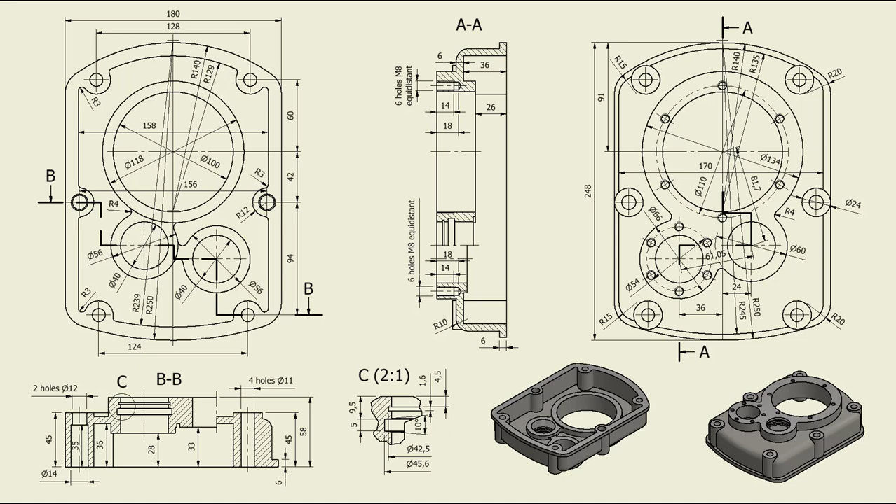Hi my friends, let's model the part number 77 from my collection of 100 parts.

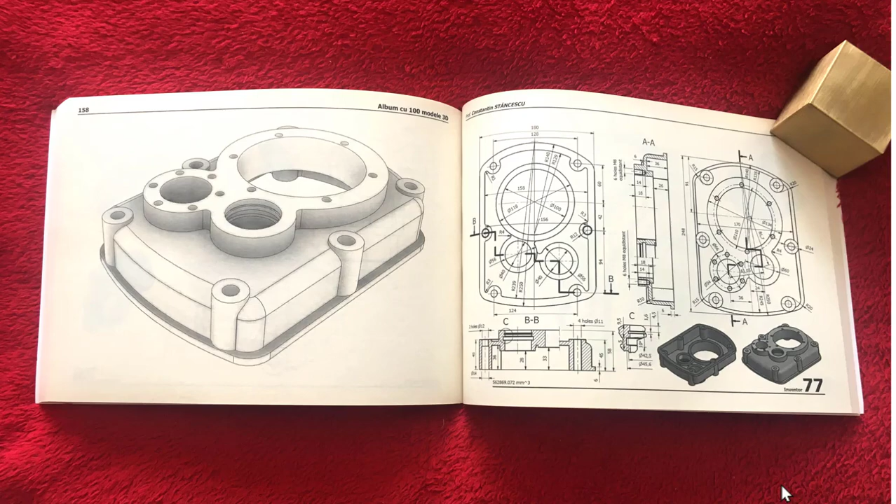The picture for this part is this, and there are some difficulties to create it, but not so great. They are many, but not difficult. Yes? We start by creating this face, the bottom, this one, as a frame. Yes? Then we extrude it on a height.

Then the other features. Dimensions for this frame are here. 180 and 248 are the general dimensions. The others are here and we'll use them. I don't enumerate. You see them in the picture. Let's start.

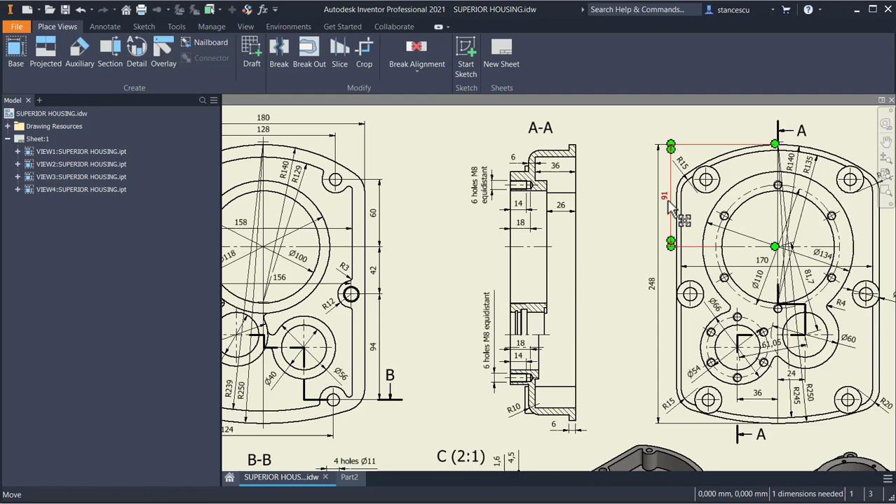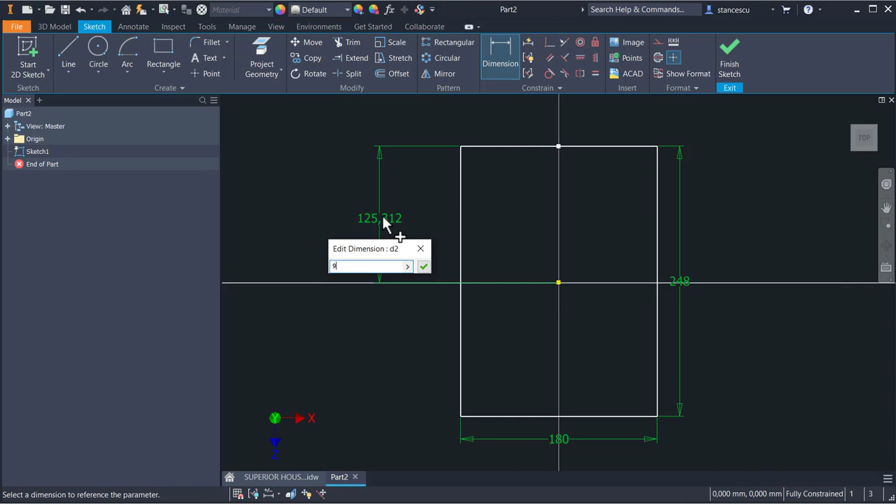This is the plane, X horizontal, and then we draw a rectangle with that dimensions, 180, tab on 248. This midpoint is on the same vertical with the center point, and there is a dimension here, 91, from the up to the center of the main hole. We use this to place here the center point, 91. These two are for tangency. They are not participant in the extrusion.

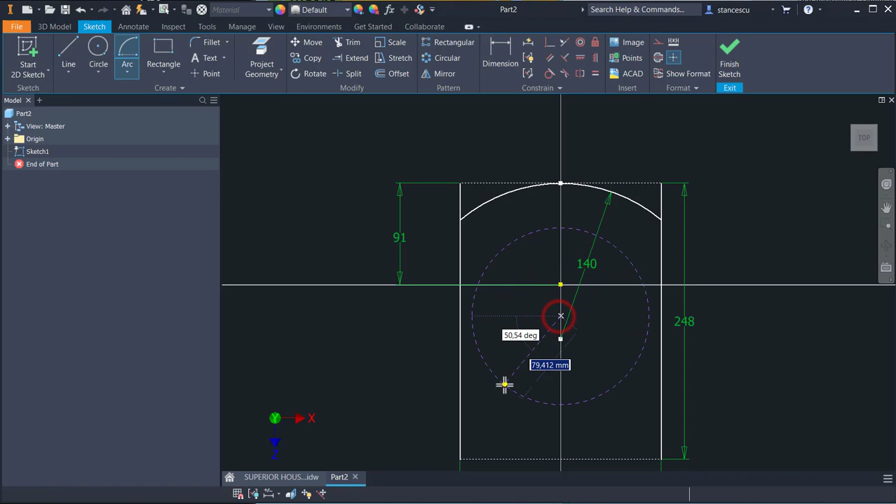Next are some arcs tangent to the lines. Here must be extended because I want to be limited. The center is on the same vertical, tangent up, and radius of 140. Same is down, from one side to the other. Both points are okay, and the center is on the same vertical, tangent, with another radius of 250.

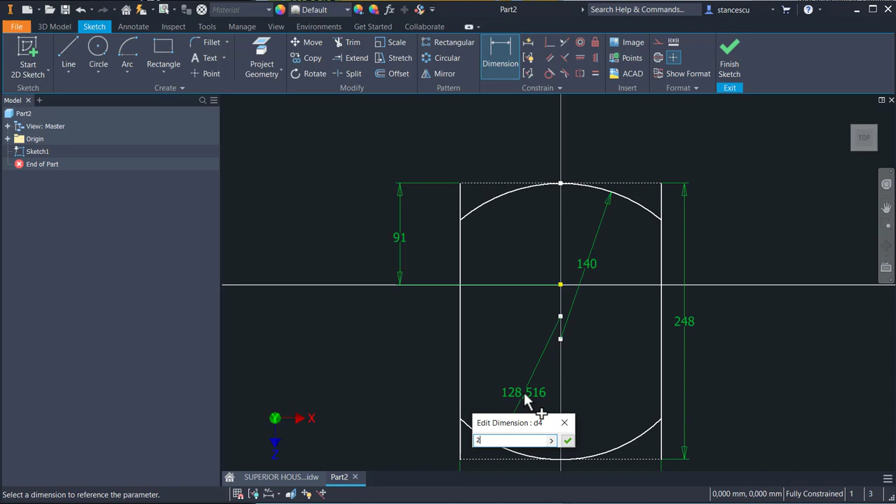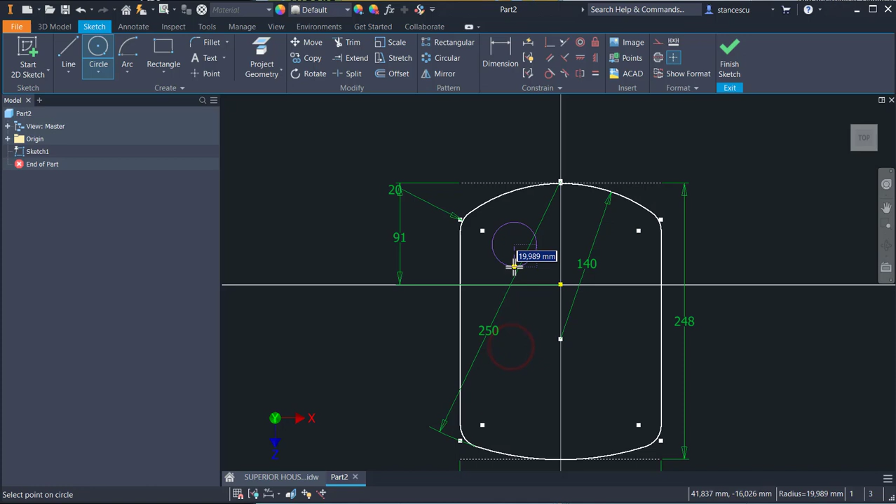Okay, now I make fillets of 20 between these arcs and lines. Okay, then 6 circles, one of radius 12, and the others will be placed anywhere, being equal in radius one to each other. Now pairs are on the same horizontal.

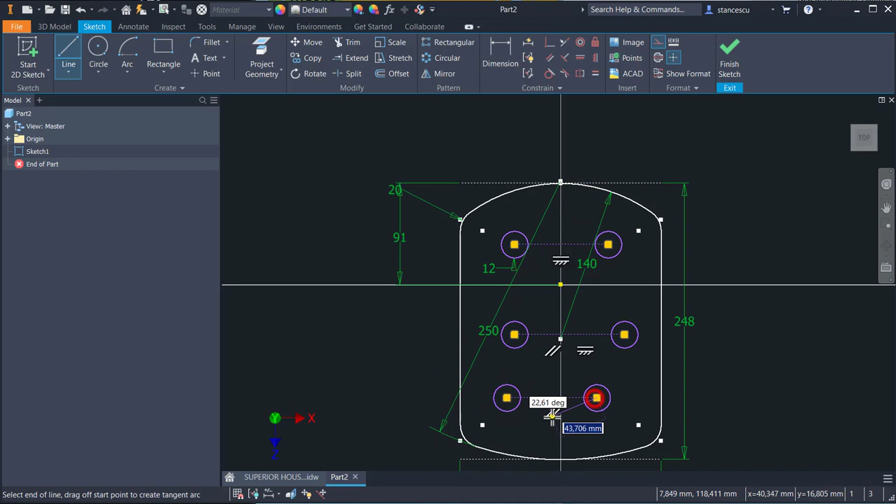I have to draw as construction lines connections between pairs, because they must be aligned with their midpoints with the center point. The midpoint centered, midpoint centered, midpoint centered. Dimensions measured from this point are 60 and 94.

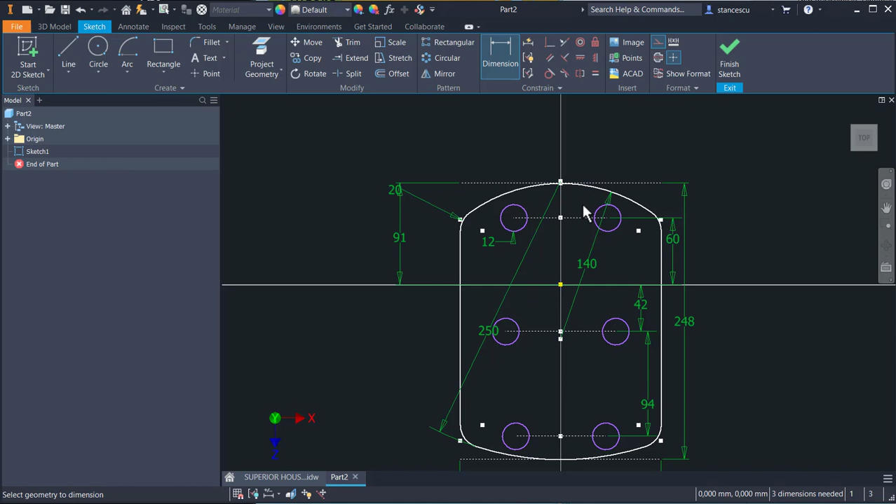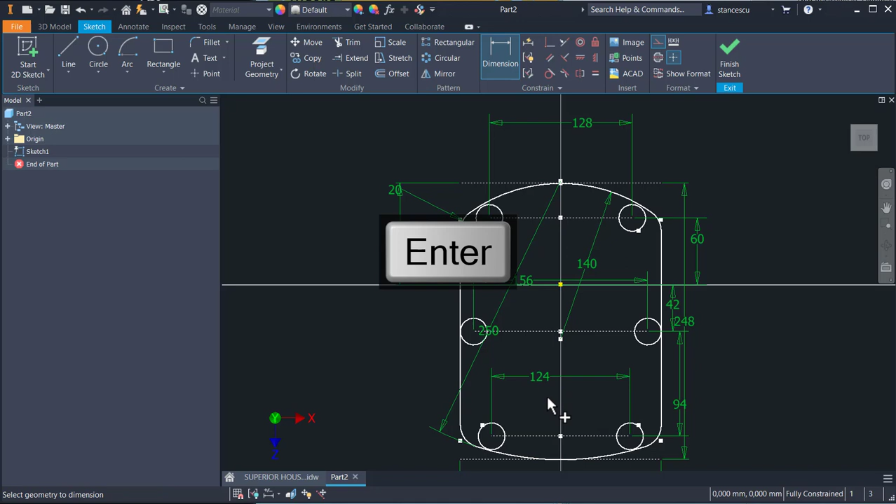And distances on horizontal are 128, 156, and 124. Okay. A line from up down, but not as a construction line, which must be split or trimmed. Yes, trimmed, because I apply collinearity

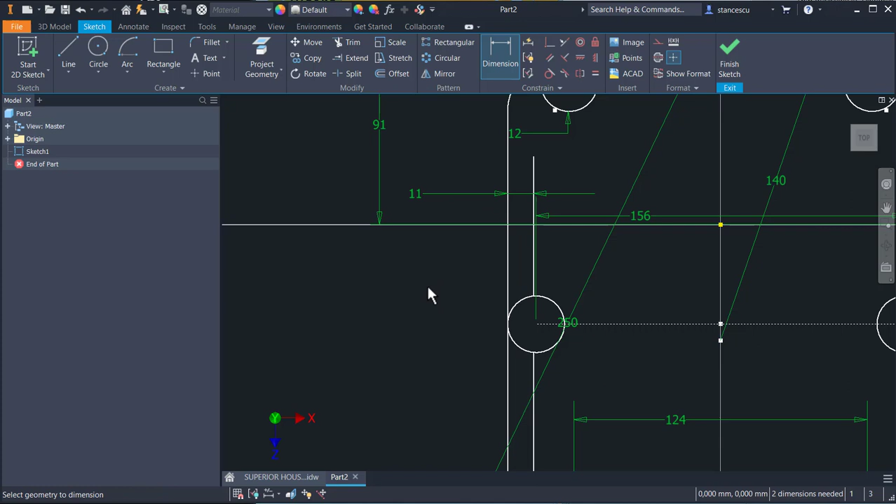and the distance of 180 minus 158. Dimensions are in the drawing divided by 2. I don't come back to them because there is no time. You can verify.

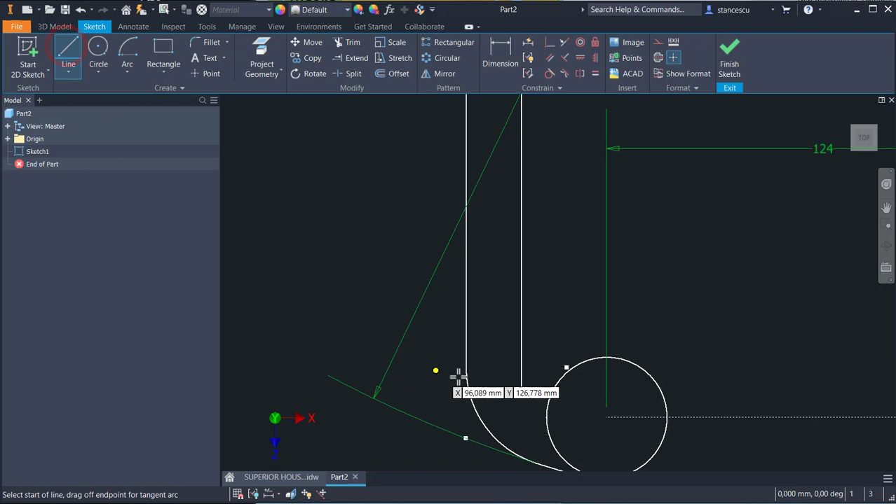Now I draw an arc between the end and the circle with a radius of 3. Here is a tangency, but here is not. Same in the bottom, a line from here to a point, tangency, and radius also 3. Here I trim the circle and I apply fillet of 3. You see here fully constrained all the time, yes? I keep this very careful, not altered.

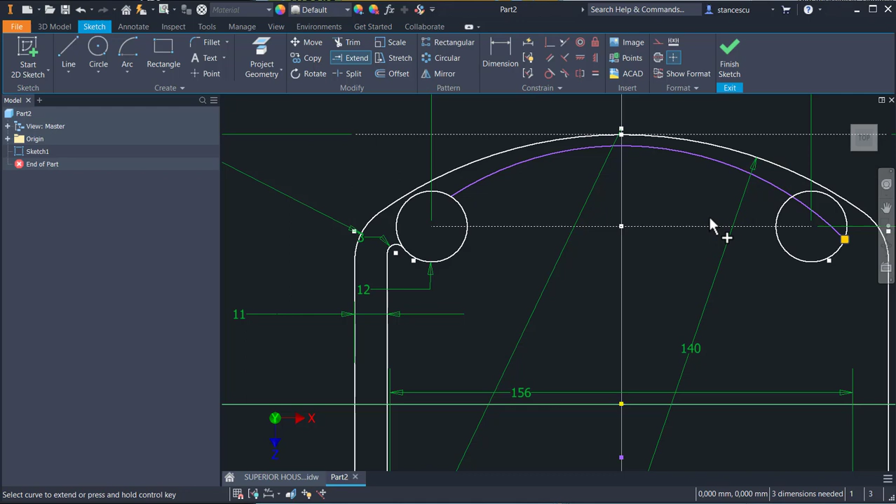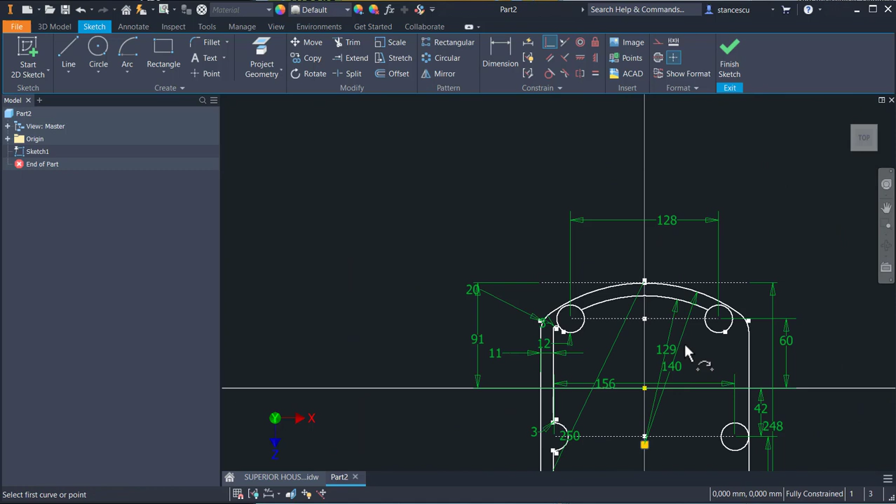Now there is another arc, with the center on the same vertical, starting and ending to the circles. Here is not well ended. I extend, cut all I need. This point on the same vertical with the center point. And the radius is 129, the center being over this because they are concentric. Yes. The distance of 11 is well presented here. Yes, this distance. Now I trim this. I apply again fillet.

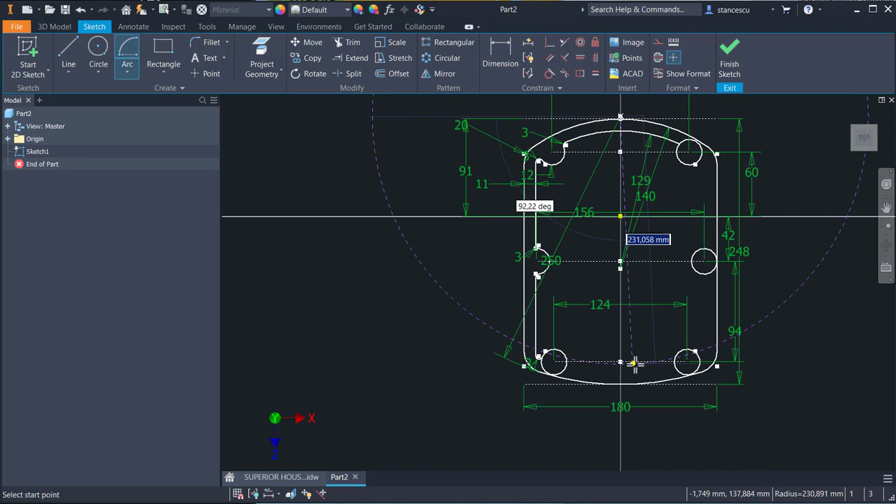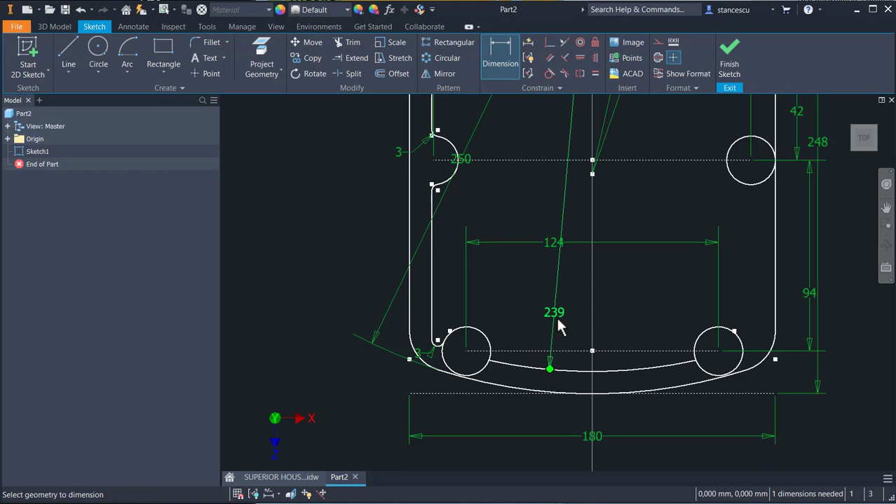And I make the same thing by creating an arc with this center, because that is also concentric, from the circle to the circle, the radius being 239, to have the same difference of 11 between these two concentric arcs. Trim like up, I trim the circle and I apply the fillet here of 3.

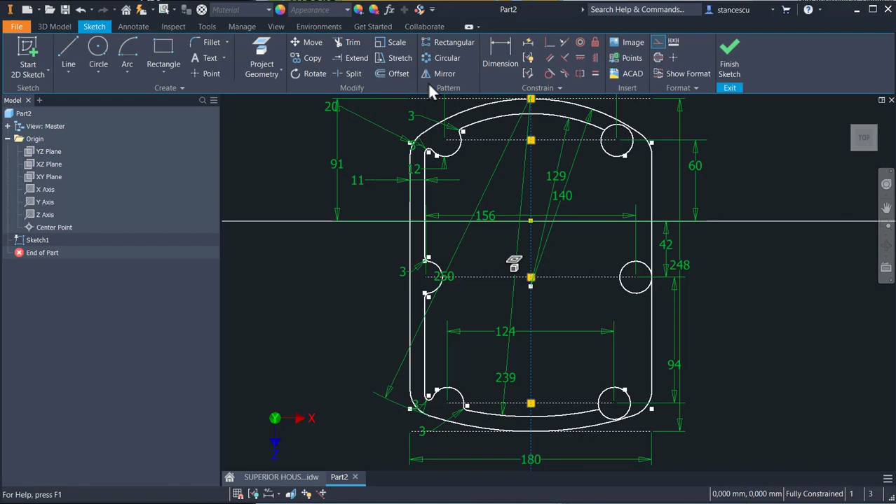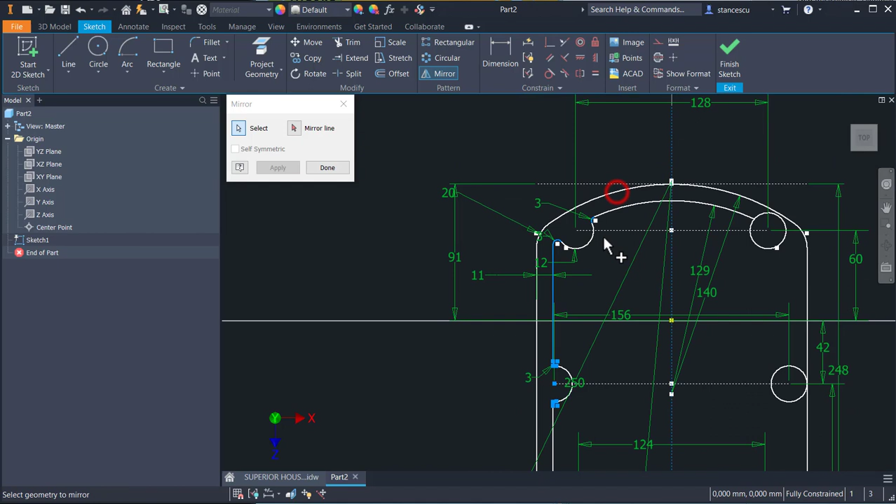Now I mirror these elements, entities, about the vertical axis, which is Y. I make this line a construction line. Mirror this arc, this line, 2 arcs, another arc, and another arc, and also this one, about the axis. Okay, now this was not mirrored. Let me mirror it also about the same axis. Good. Trim this and these two ends.

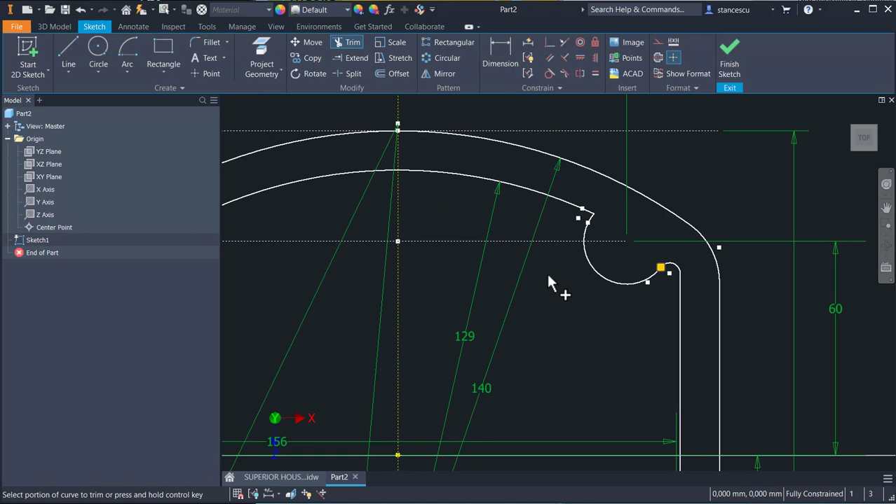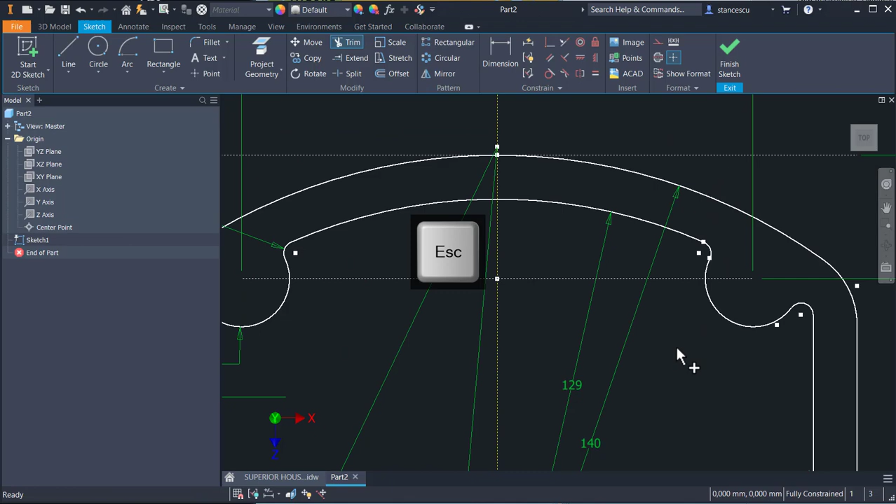And here is an arc which was not mirrored. Let me mirror it about this line axis. To trim, so we still have fully constrained. This is the contour. All the lines are white, fully constrained, and the mark of fully constrained.

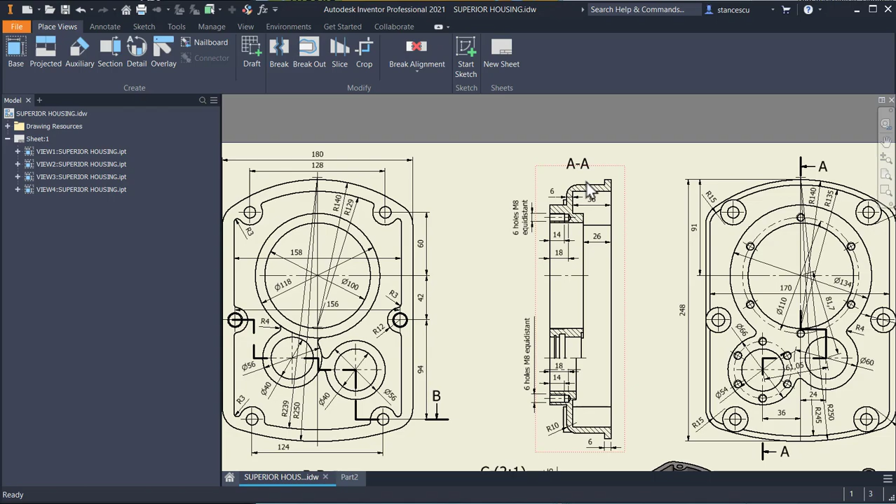Now the thickness is 6. We created this frame. Finish sketch, F6, extrude on 6. Okay. Next is this wall. Yes, this wall with thickness 180 minus 170.

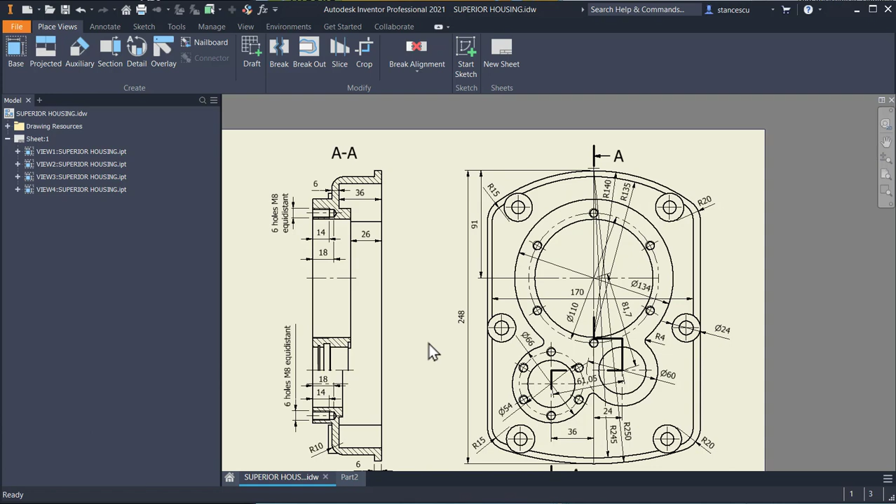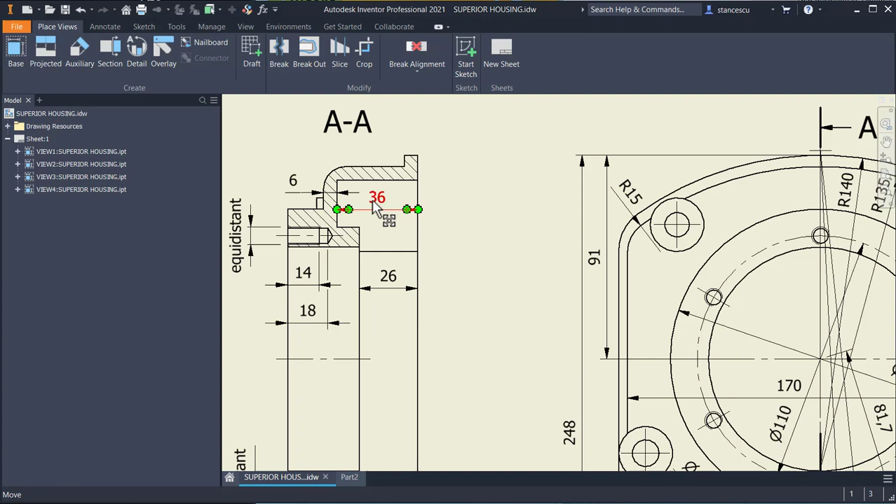I create a sketch here with an offset of 180 minus 170 divided by 2. This means 5, of course, but I don't make calculus by head. The thickness is 36 because we'll create another extrusion of 6. 36 from bottom, from here, is only 36 minus 6. Yes.

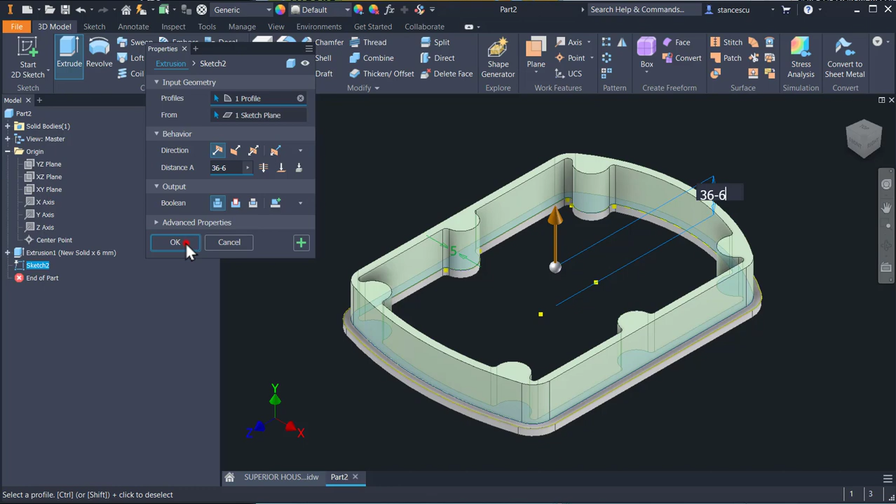Now extrusion of this zone on 36 minus 6. Okay. The cover is also 6. Yes. So we create a sketch and we use it to extrude this on 6. Okay.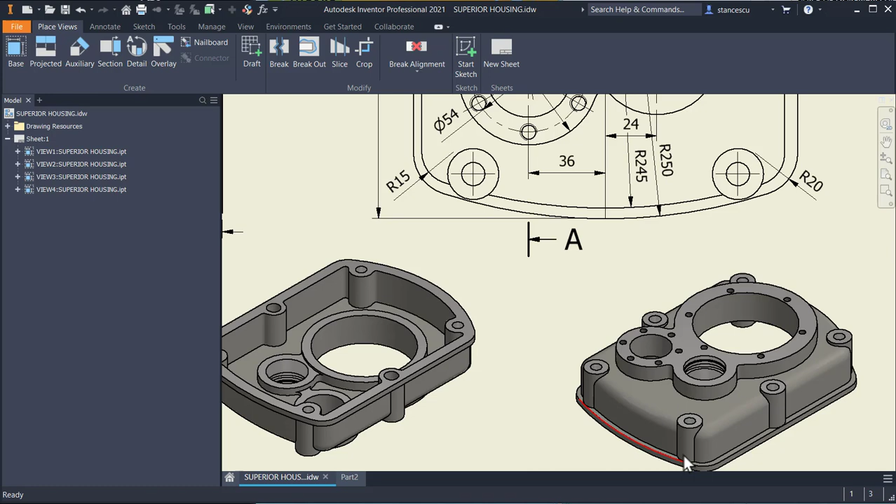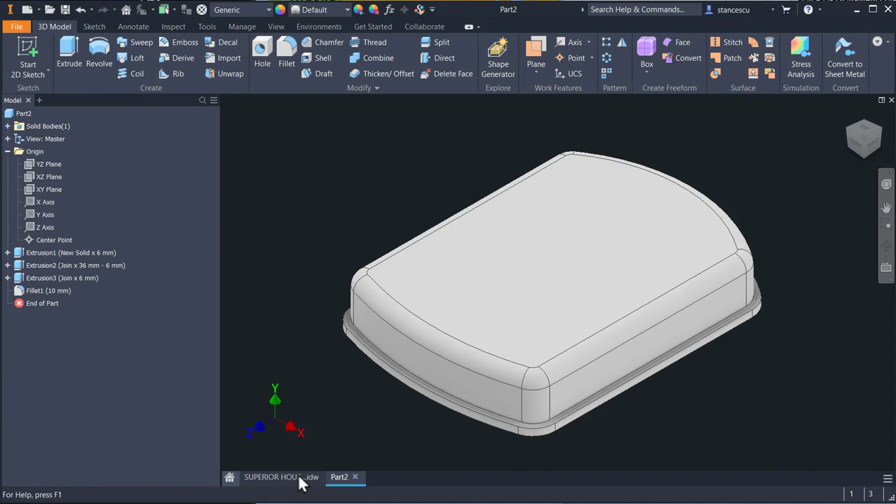As you can see, there is now a fillet around all the part before to extrude this, of 10. Let's apply fillet of 10. It's already placed. Good. We create circles here to extrude at 45. Yes.

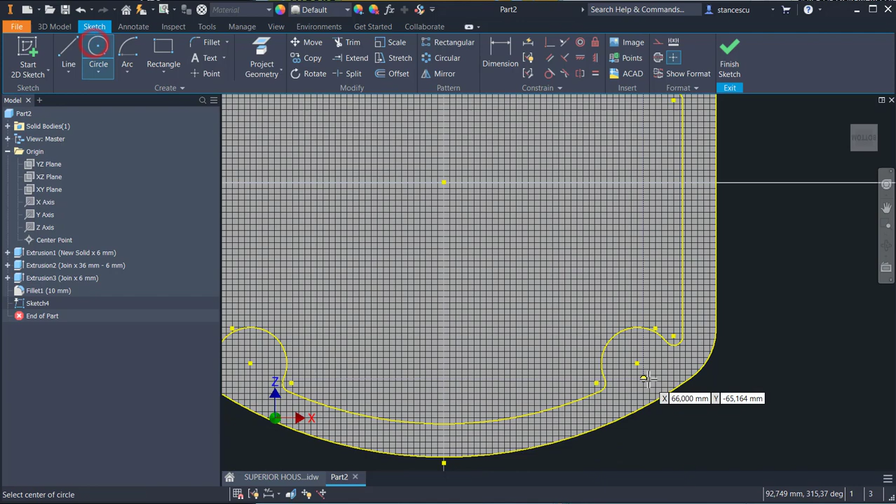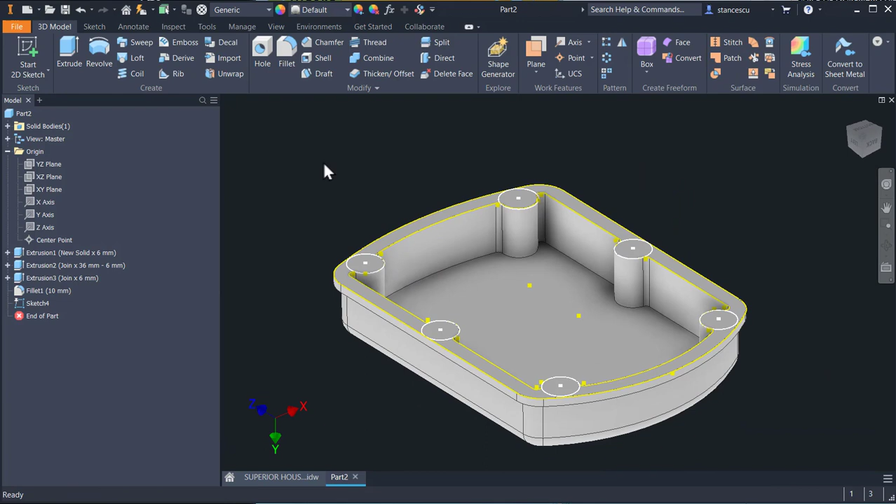Sketch, circles, which must be white, not like this one, which is wrong, and must be manually constrained to be equal with the original. A zoom in is better than before. Finish sketch, extrude each circle, in the other direction, join 45. Okay, you see, this is a good result.

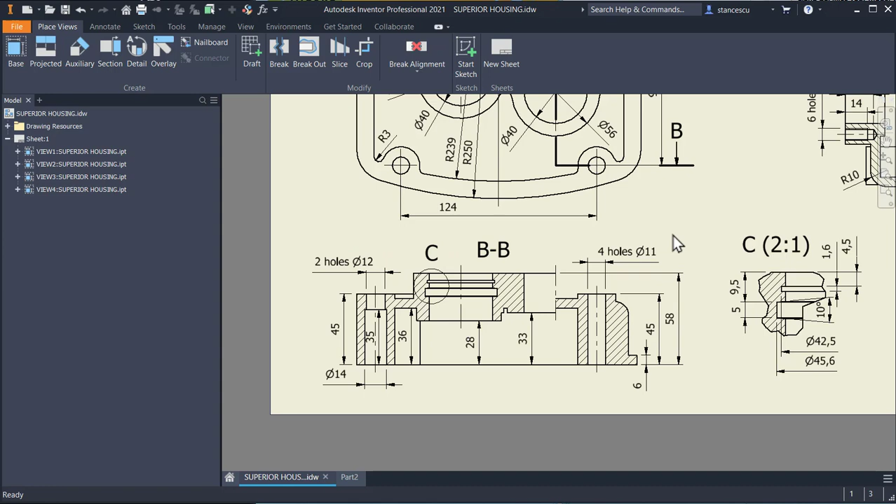Next are the holes, which as you can see are of two kinds. One is counterbore and one is simple. Dimensions 14, 12, 35, and the other 11. The simple ones are these four, 1, 2, 3, 4, and the counterbore are these two. This is why I create them from the back. To apply counterbore and simple together, I create a sketch here and I end the sketch.

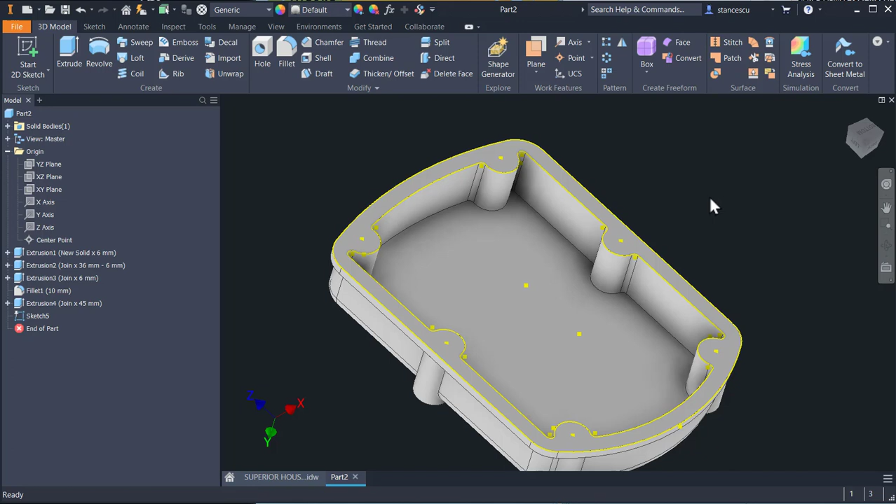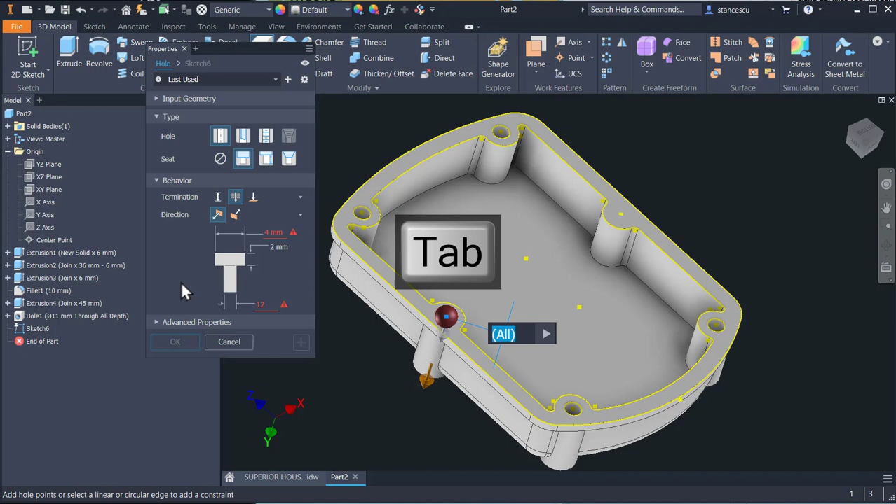And now holes 11, they are simple, and through. This point and 11, and the same are for 4. Next is the counterbore, but now I need to recreate the sketch and to finish it. Hole on this point, counterbore with 12, tab all the way, then 14, then 35, both holes. Okay, F6.

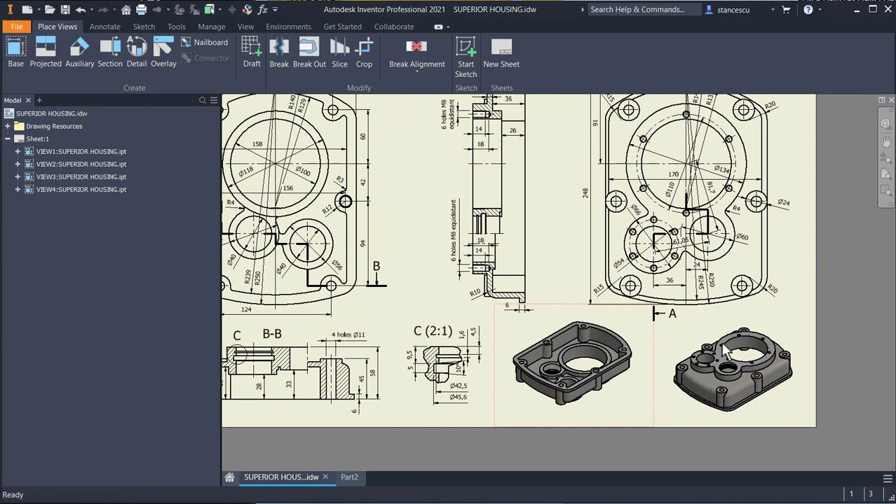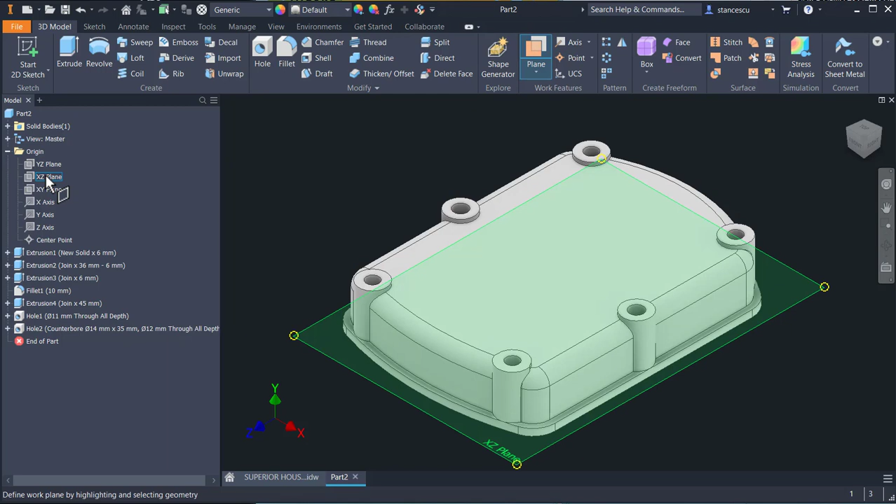We continue with this feature, which is placed at 58 from the bottom, and we use this drawing, this view, to make it, respecting 134, 60, 66, and the dimensions 81.7, 61.05, 24 and 36. Let's do them. We start by creating a plane at 58 from the bottom. A plane from the bottom at 58 with plus.

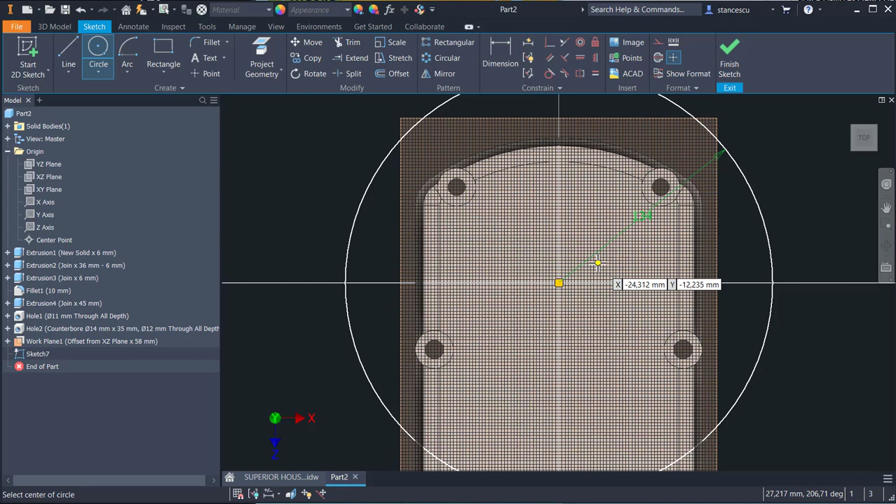Then a sketch with the circles. The first one is in the center point, 134, but not radius. Control Z, 134 diameter. Another one is here and another one is here. They are with diameters of 60 and 66. Aligned dimensions, 81.7, 61 aligned, 61.05, and distances of 24 and 36.

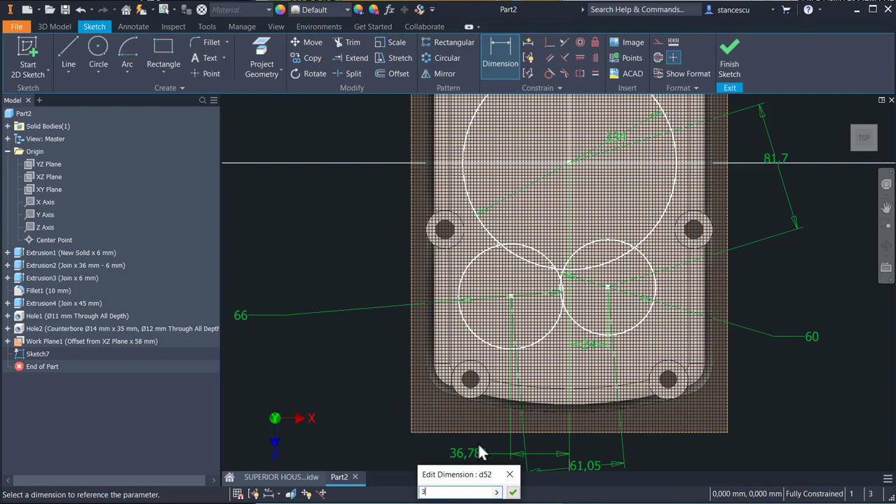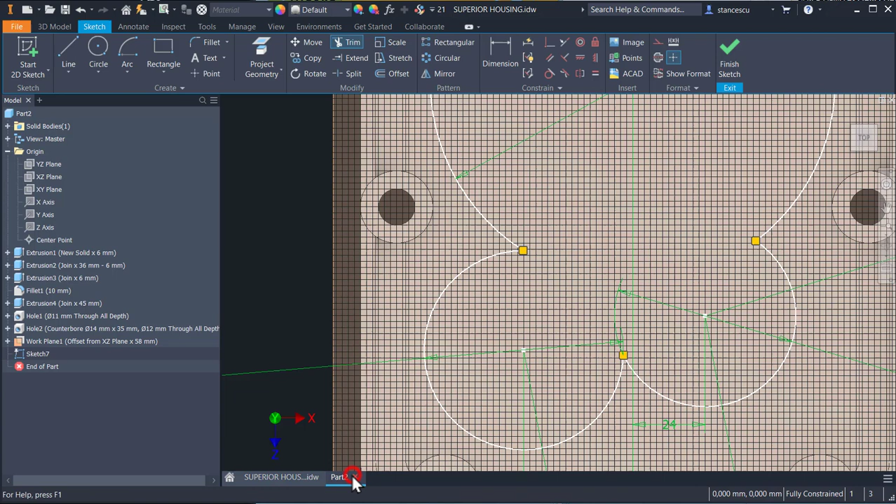They are completely defined. Now we trim by looking to not disturb the fully constrained. Trim. I keep pressed the button of the mouse. All the lines are white. This is good. And now I apply fillet of 4 millimeters at the connecting points. Fillet 4 and the 3 connection points or peaks. Okay, this contour is to be extruded to the part. Very simple.

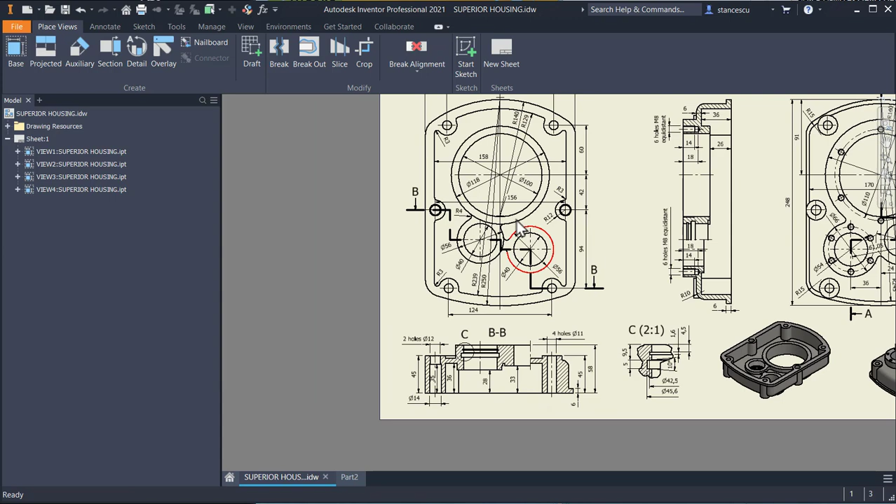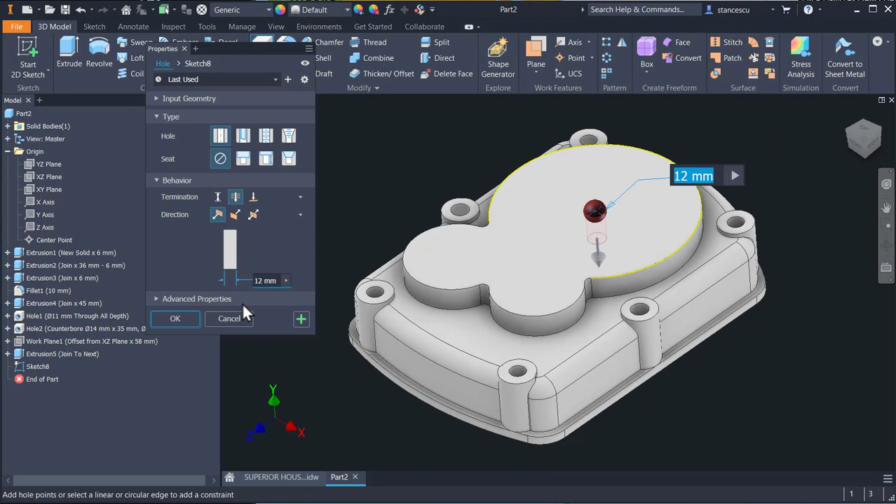Yes, this is. Now we create the big holes, which are 100, 40 and 40. Hole, simple, through this face, this center, 100, plus this face, this center, 40, plus this face, this center, and also 40. Okay, good.

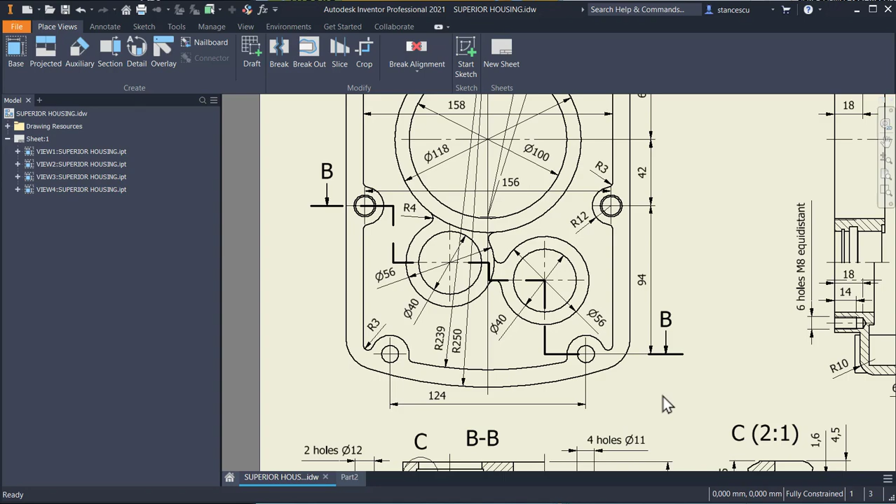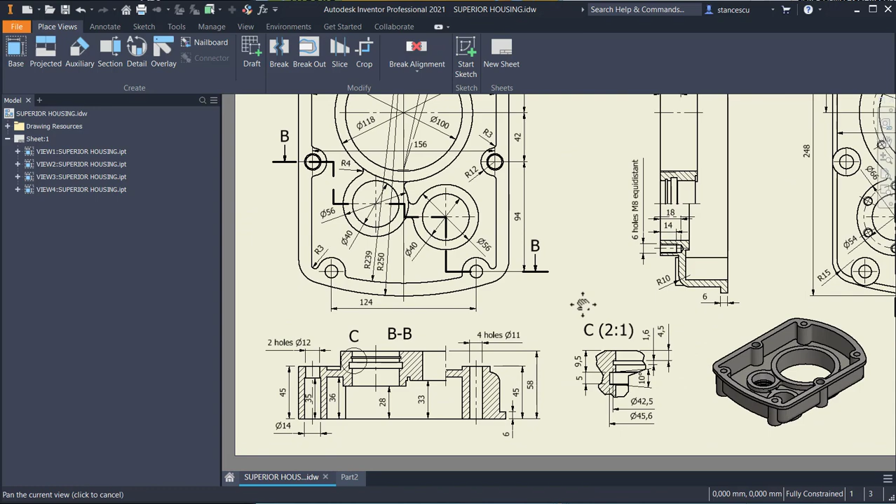As you can see, nothing is here, but we have to place another extrusion on this face. Let's select it and let's see what extrusions. You see here, this is the highest, this is the next, and this is the lowest. This order. Distances being 36 is the interior, 28, 33, and the third one is 26. Yes, we keep in our mind the order. 28 is the left, 33 is the right, and 26 is this large one.

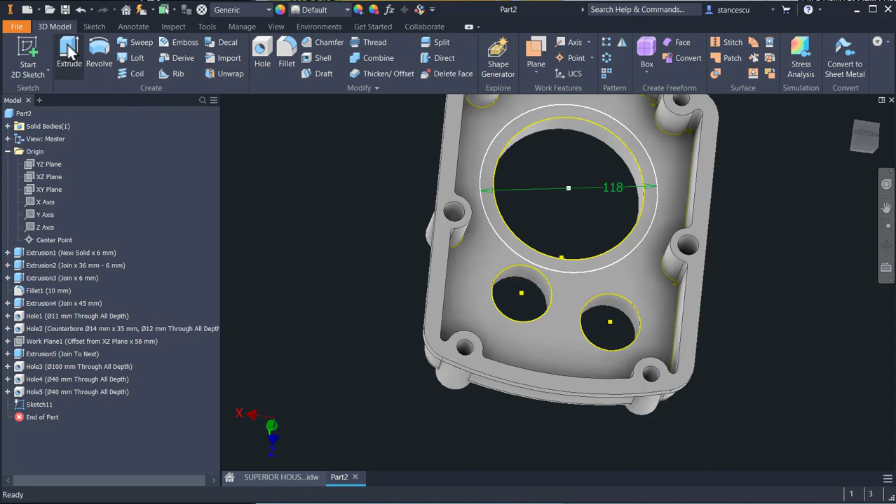Don't forget, we have to place here a connection with the radius 4, and also here, but this is the second problem. A circle with a diameter of 118. This one is the main extrude at 36 minus 26. Okay.

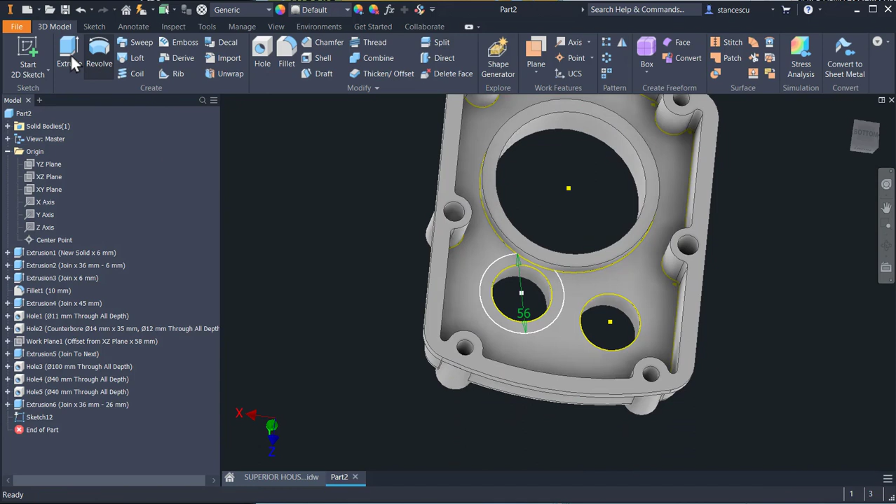Next sketch is with a circle of 56 diameter and with the extrude on 36 minus 28.

Okay, the last one is also 56 diameter, of 56, a circle with a radius of 4, another one which is the same diameter. F7 to see inside, and tangent for each one with each contour.

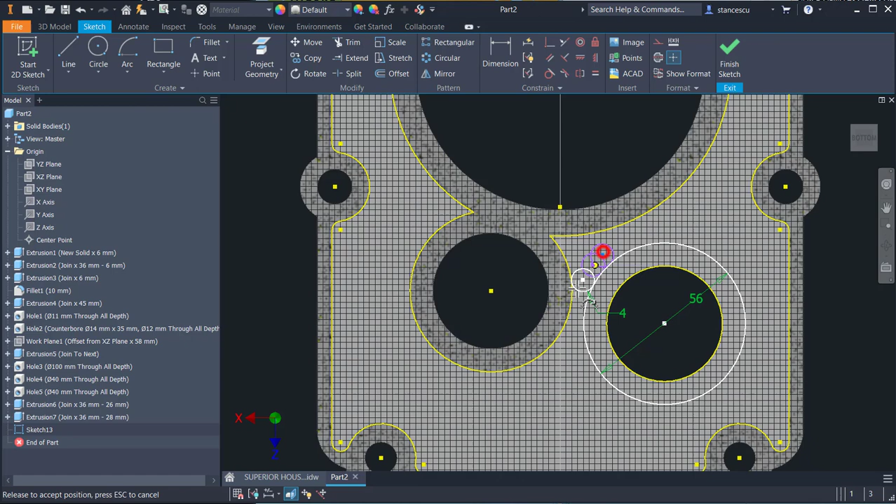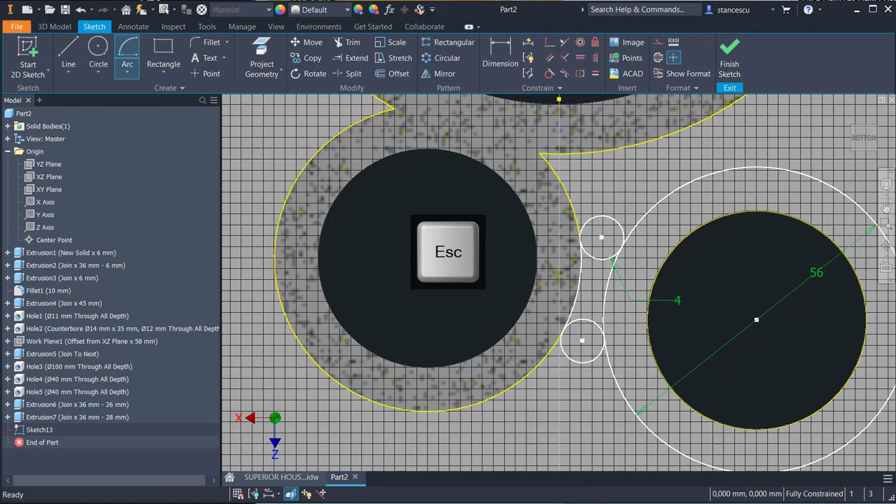Now I move this to the bottom, tangent to here, an arc with the center and the first point here and the second here. This must be construction, and then we trim, fully constrained. Yes, I trim this, this and this. Not good. The last is this.

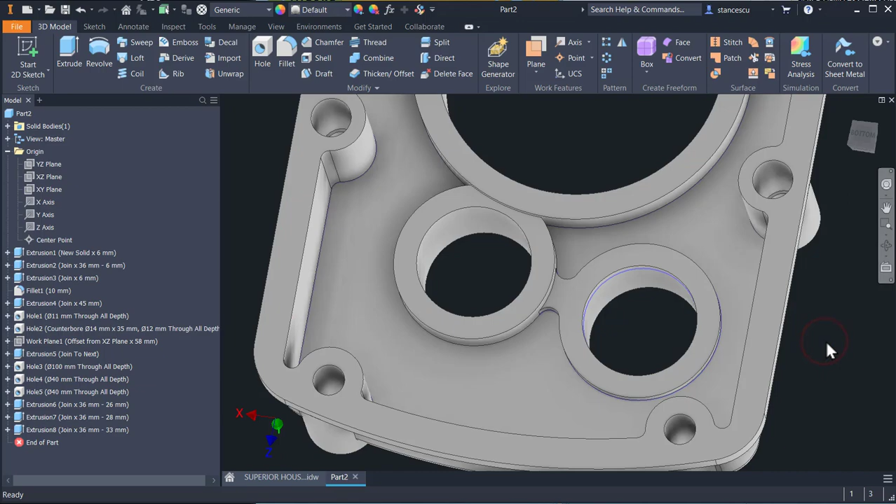Okay, extrude this area on 36 minus 33. 36 minus 33. Dimensions are in the drawing. Yes, everything is okay.

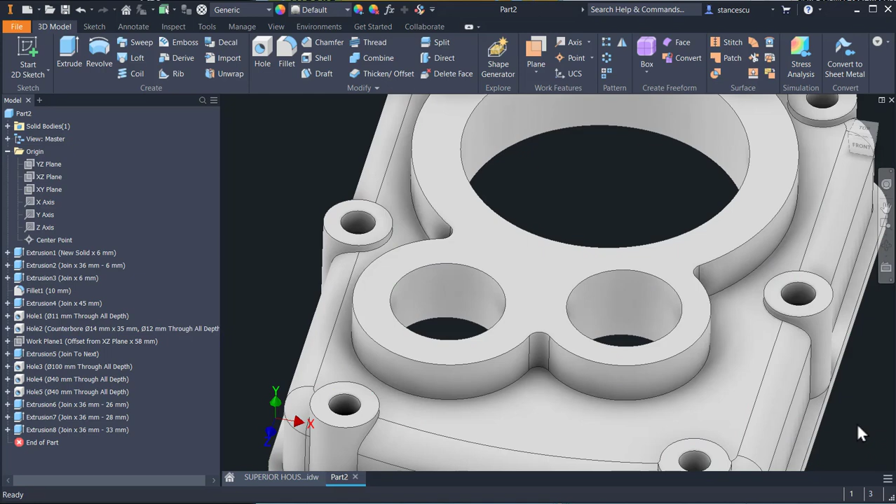This is the one with the maximum depth. Yes, no, this is okay. It means that this has some channels inside. The channels are here. Yes, this means that we have to create a plane where to draw channels, the section of each channel, and to create revolve.

Let's create this plane, a plane like this one, but on this axis. We create a plane, and now be very careful by starting with creating a point which is on this face, and I create an axis to create the point. And now I show the plane, and this is what I obtain.

Yes, this plane is centered on this hole, not on this hole. Good. I create a sketch here.

By projecting this line, this generator. I make them construction, and I also project this to have an end, also construction. Why? To draw a center line between this midpoint and this midpoint.

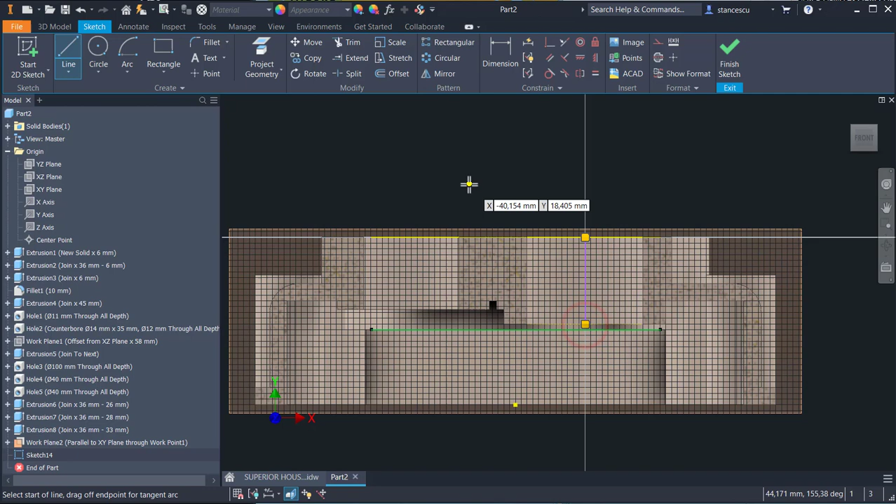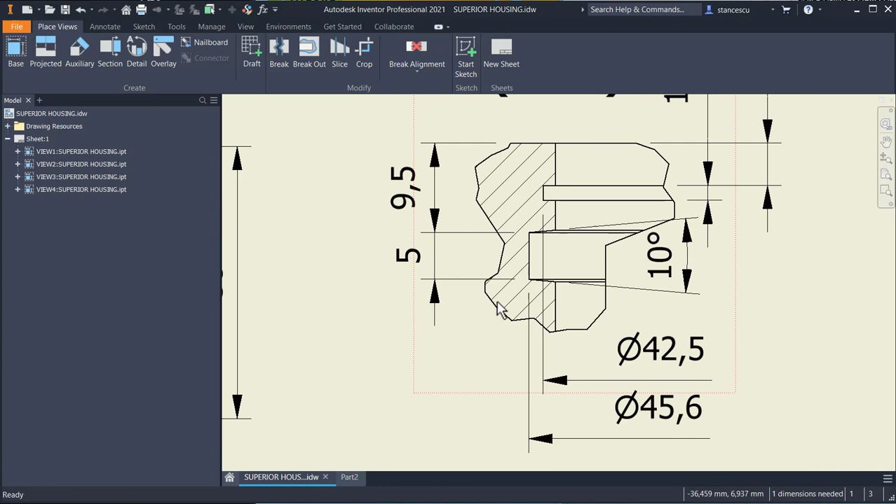Center line. Good. The drawing is here. Yes, a rectangle and a trapeze, with these dimensions. I don't repeat them, we have no time.

Okay, let me create them here because I have this generator already projected. The other one is a trapeze. These two sloped lines are equal.

This line is vertical. Yes, and these are equal. The angle is 10 degrees.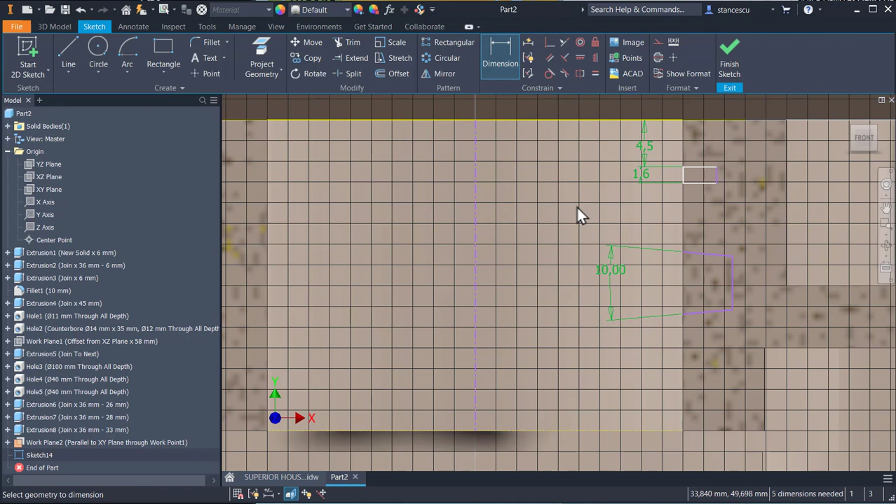And dimensions are for the small channel, 4.5, but the thickness of 1.6. The diameter is 42.5.

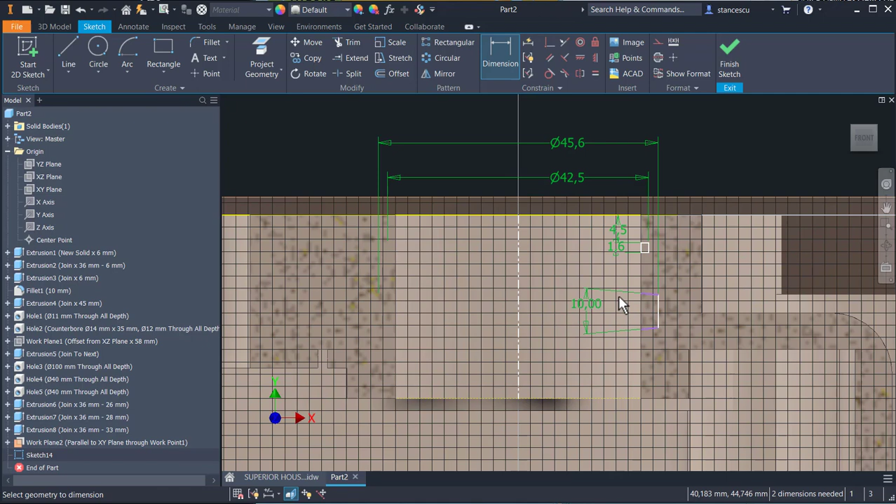The other diameter is 45.6, and its superior end is placed at 9.5, and this is 5 millimeters.

All the lines are white. I create another one to close the area. Finish sketch, and look here. It's pretty difficult to select there, so I propose you another way.

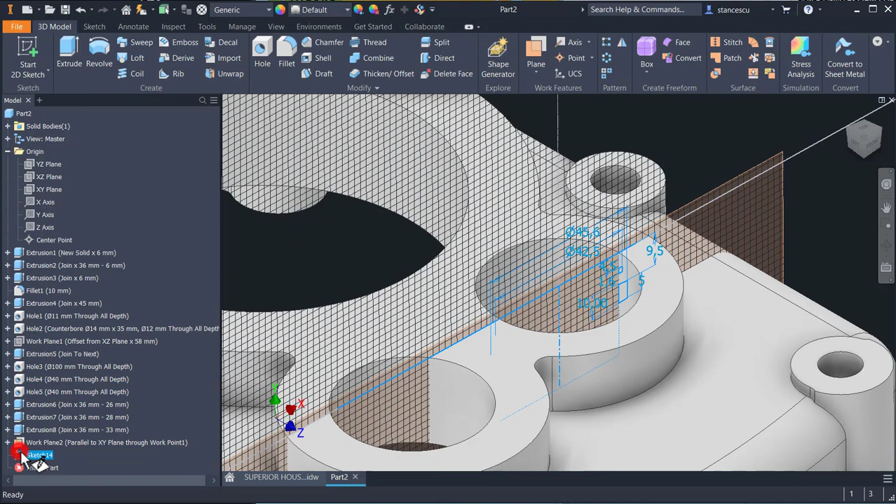Look, double click on the sketch, F7 to see inside, and now instead of finishing the sketch, I use the key R, from Romeo R, which keeps this image and invokes the revolution, R from revolution. The same is for extrusion with E.

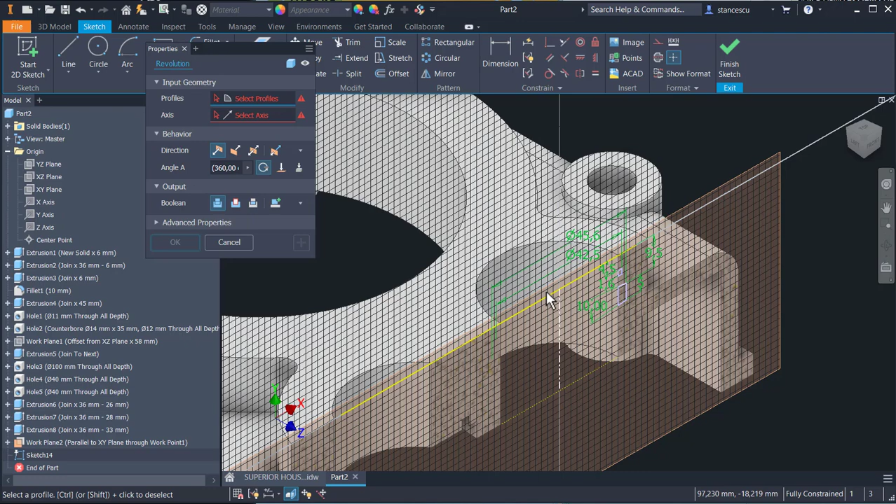I select profiles, this and this. I go here and the axis is selected, and I apply cut. Yes, not join. Okay, that's all. Elegant, very elegant.

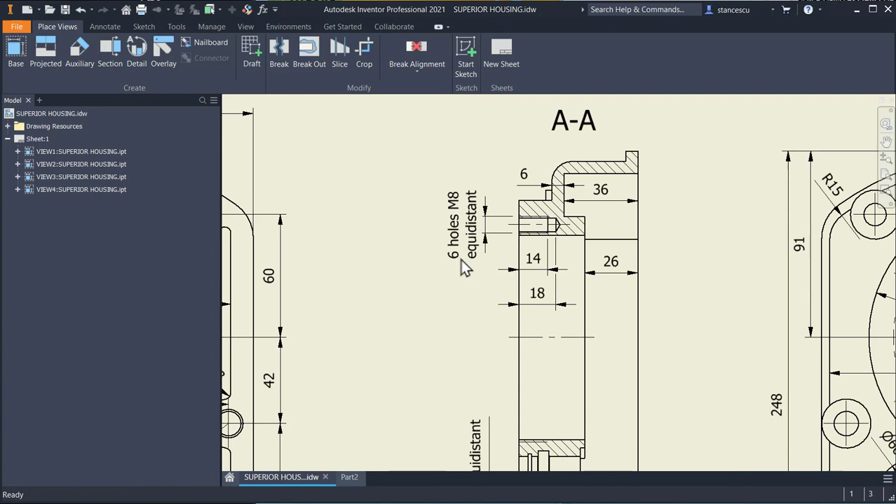Good. What else? The last are these holes. All of them are metric 8 and have the same, yes, the same. The thread is 14 and the depth is 18.

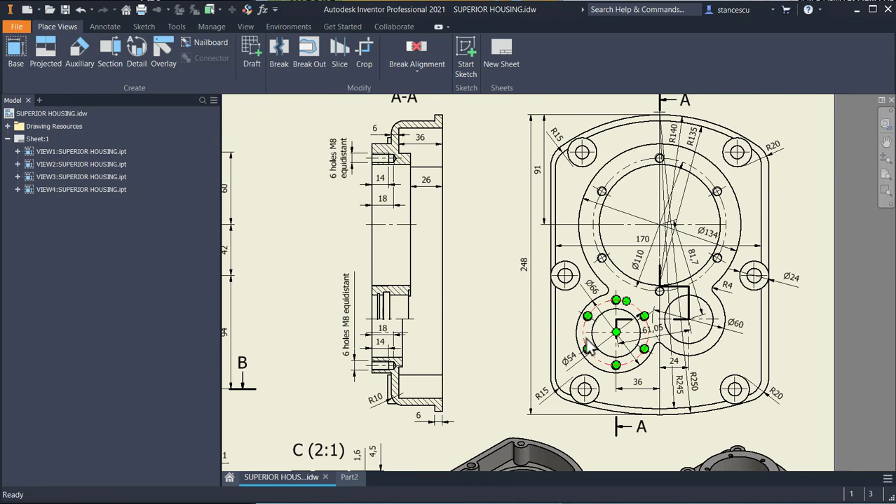14, 18. 6 holes around the big frame and 6 on the left. Good.

Let's apply these holes. A sketch here, a point placed somewhere in the air, but it must be on the same vertical with the center point, and the distance is half of the diameter, which means 110 divided by 2. The dimensions are in the drawing.

Finish sketch, hole, threaded, distance, and not full depth. I select the diameter 8, metric 8 with the pitch of 1.25, the normal pitch, and here.

The full depth, the whole depth is 18, tab, the angle, tab, tab, and the thread, you see here the cycling tabs, yes, is 14, yes, 14.

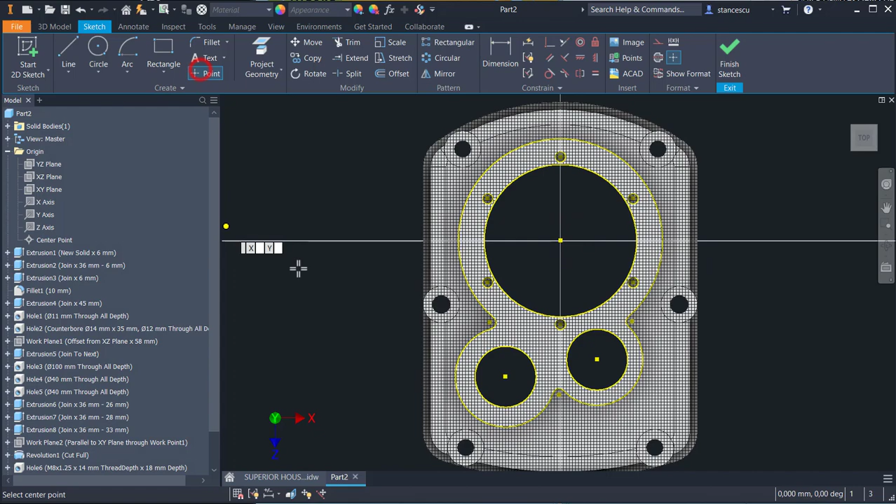Another one is on the same face, point in the air somewhere on the same vertical with a point and at a distance of 54 divided by 2.

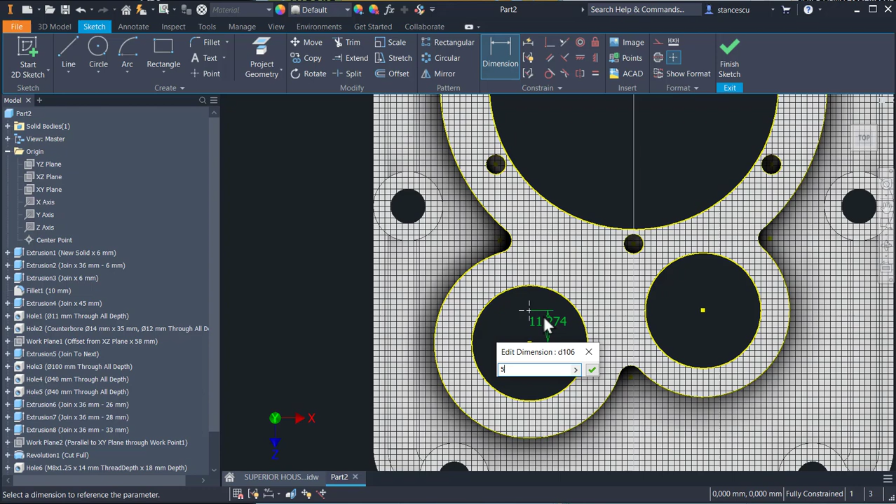Finish sketch, hole. Okay, I'm sure that is the same. Yes, look here, metric 8, 18, 14. Okay, circular pattern of this about this axis, 6 by default.

F6. My friends, this is the part. All the features are present. I think that there are no more ones to be placed, radius, fillets. In my opinion, this should be filleted with 4, it's wonderful, but the drawing doesn't have this.

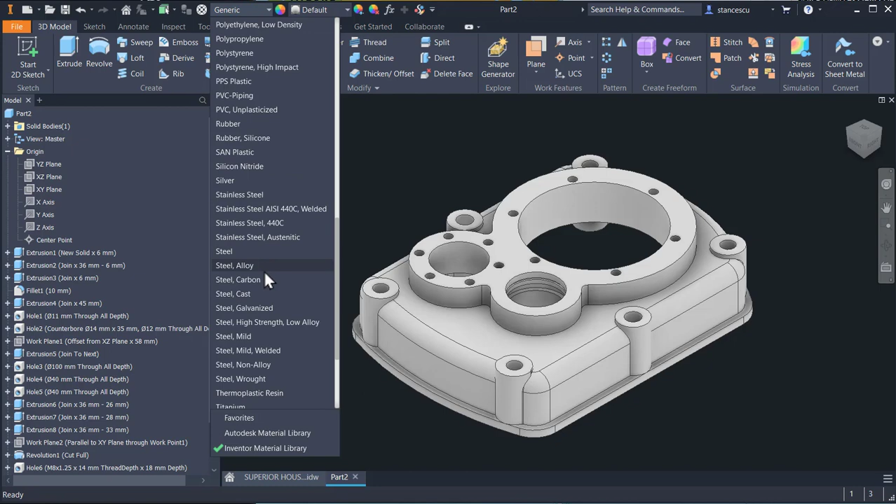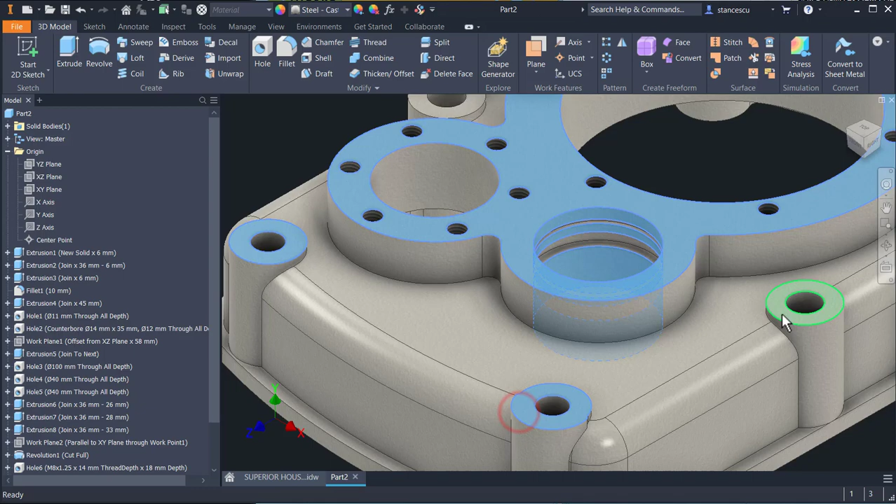So I go to assigning materials, Inventor, steel cast, also steel cast as a general aspect, and this face, this internal faces, the bosses, and the bottom face, are machined. You can add what you want.

Let me place also this as machined. Machined, steel polished. F6. Properties. Physical update: 4 kilos and 400 grams.